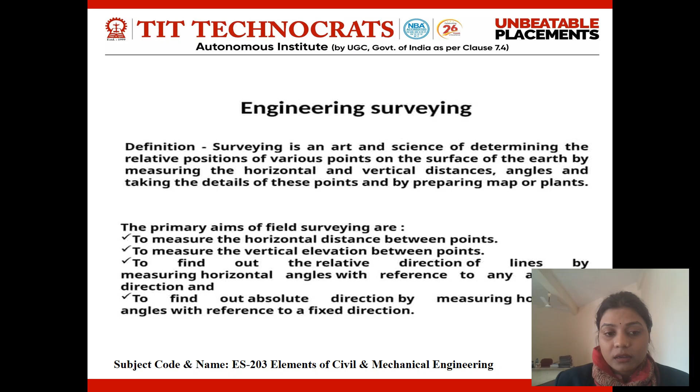What is the purpose of surveying? To take the measurement or to determine the relative positions of the points on, above or beneath the surface of the earth, to determine the areas and volume, to lay out or mark the position of the proposed structures on the ground, for example buildings, canals, etc., to prepare a map or plan to show the relative positions of the objects on the surface of the earth, or to fix the boundaries of districts, states, and countries.

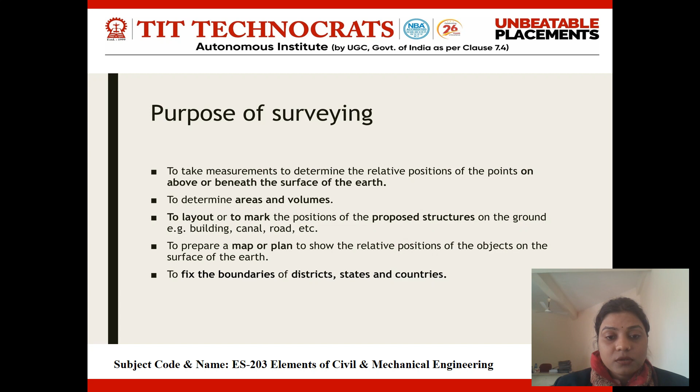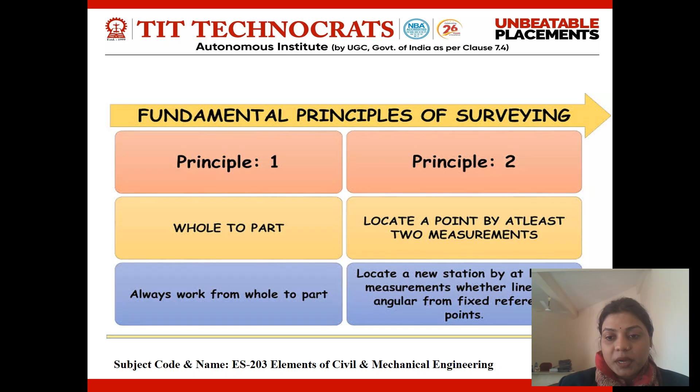Okay, what is the fundamental principle of surveying? There are two principles. Principle one is whole to part: always work from the whole to the part. Principle two is to locate a point by at least two measurements. To locate new stations by at least two measurements, whether linear or angular, from the fixed reference points.

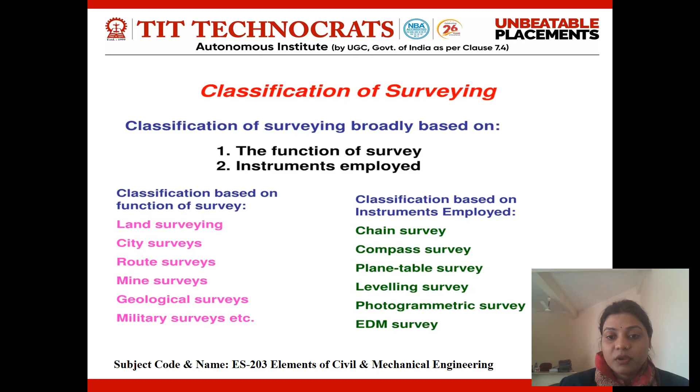Classification of surveying. There are mainly two classifications of surveying. Classification based on the function of survey: land survey, city survey, route survey, mine survey, geological survey, and military survey. Classification based on the instrument: chain survey, compass survey, plane table survey, leveling survey, photogrammetric survey, and EDM survey.

What is a chain survey instrument? Chain, the metric chain. Chains are measuring instruments used in surveying, formed by 100 or 150 links of 4 mm galvanized mild steel wire. These links are joined by 3 circular or oval wire rings. The rings provide flexibility to the chain, and metric chains are available in 20-meter or 30-meter lengths.

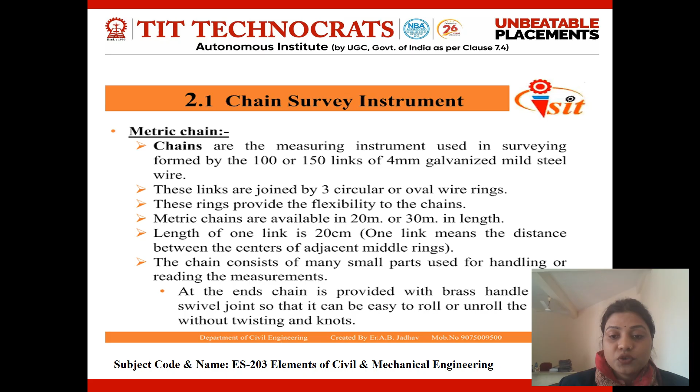The length of one link is 20 centimeters. At the end, the chain is provided with a brass handle with a swivel joint so that it can easily roll or unroll the chain without twisting and knots.

Okay, what is chain survey? Chain survey or linear surveying is the method of surveying in which only linear measurements are made in the field. It is unsuitable for large areas or difficult areas, but suitable for small areas on plain and open ground with simple details.

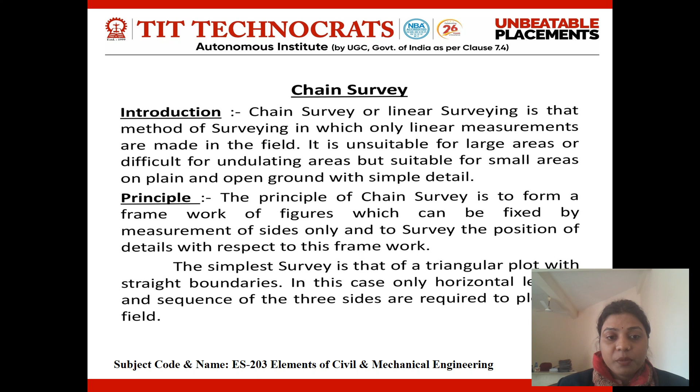Okay, here is one numerical you can understand. If the chain is too elongated: the length of a line was measured with a 20-meter chain and it worked out to be 800 meters. After measuring the length, it was found that the chain was 0.06 meter too long. What is the true length of the line? Here you have to find the true length of the line.

In the question, L is the length of the chain, that is 20 meters, and the elongation of the chain, since it is written the chain was too long, is 0.06 meter, and the measured length is 800 meters. So you can use the formula for a chain that is too long: L1 equals L plus E. Put the values and you will find L1. After that, the formula is true length of the line equals L1 upon L into measured length of line. Put the values and you find the true length of the line, that is 802.40 meters.

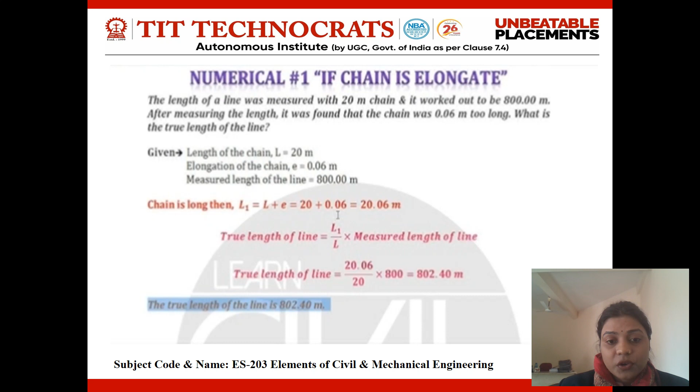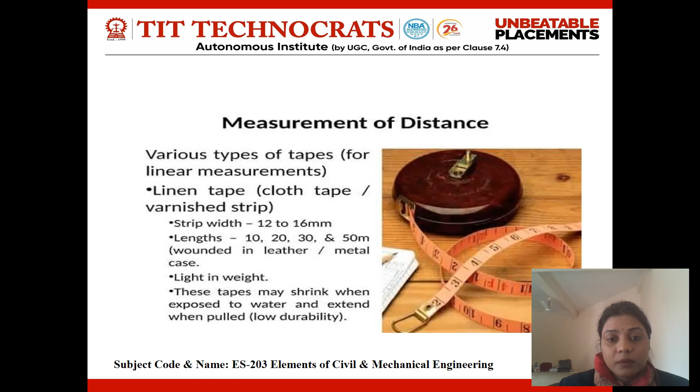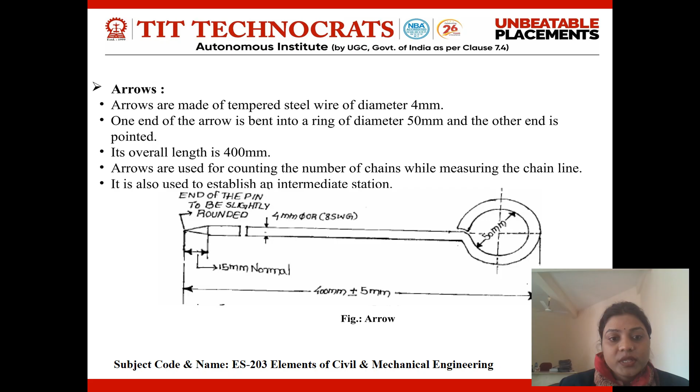Okay, arrow. Arrows are made of tempered steel wire of diameter 4 mm. As you can see in this picture, one end of the arrow is bent into a ring of diameter 50 mm and the other end is pointed. Its overall length is 400 mm. Arrows are used for counting the number of chains while measuring the chain line. It is also used to establish an intermediate station. You can see here the figure of the arrow.

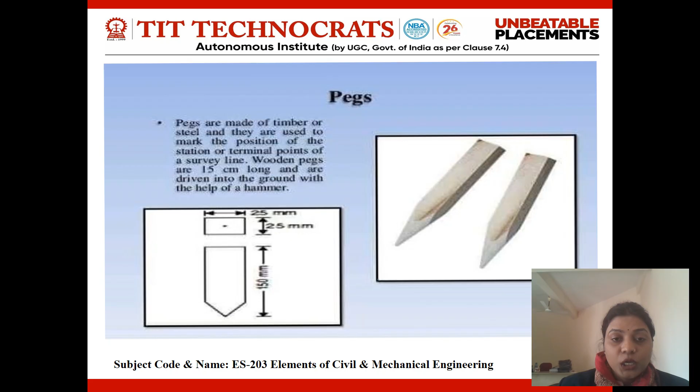Okay, pegs. Pegs are made of timber or steel and they are used to mark the position of the stations or terminal points of a survey line. The wooden pegs are 15 centimeters long and are driven into the ground with the help of a hammer.

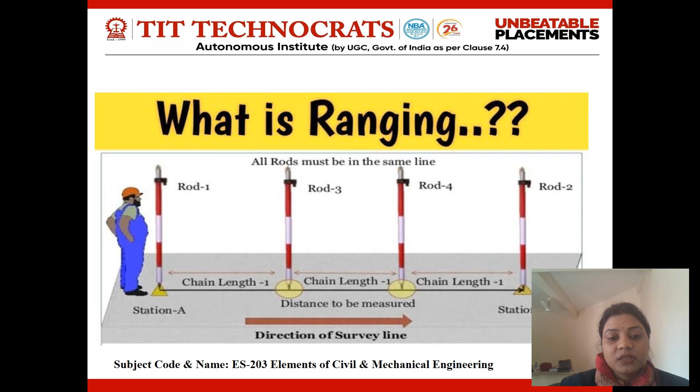What is ranging? You can see here the ranging. See the direction of the survey line and see this picture of the ranging.